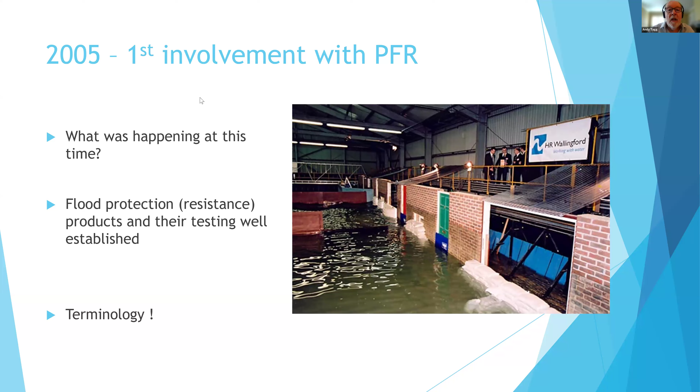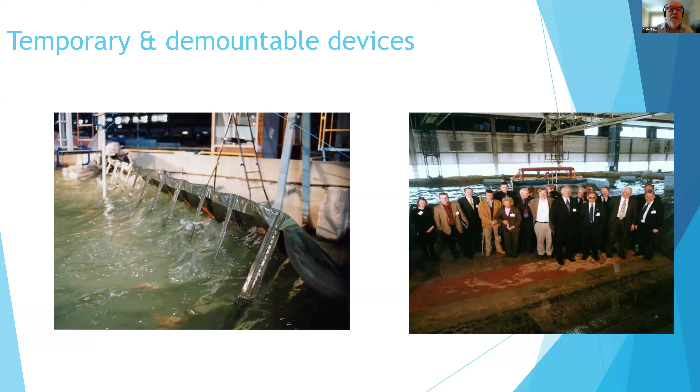And that's why we started to look at resilience, which at the time was completely separate from resistance. So in 2005, what we called resilience is now what we would call recoverability. So if we go to the next slide, Paul. Oh yeah, and that's just showing that back in 2005, there was also testing of temporary and demountable devices, but in the main, most of the testing was flood barriers, air bricks. Okay, so the next slide.

So back in 2005, DCLG set up a project led by CIRIA, and Paul Shaffer was, I think, the project manager for that. It was a research project looking at property resilience. And as you can see there was HR Wallingford, WRc, and Leeds Metropolitan University. We carried out an extensive literature search. We interviewed experts.

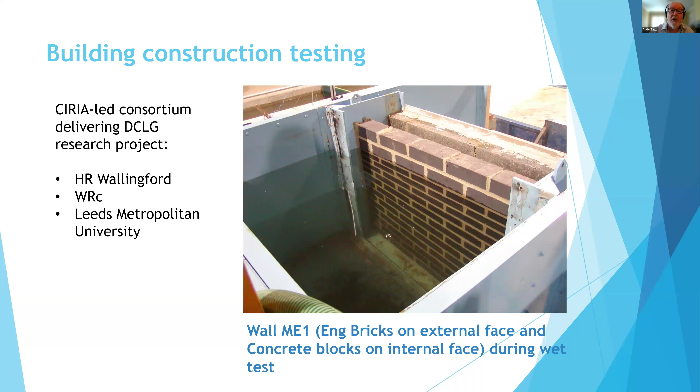WRc looked at the regulatory and legislative background to what would be involved in pushing forward the resilience agenda. And one of the key aspects that I was involved in was actually testing both materials and wall and floor constructions, as you can see there. Because even though there was a lot of common sense around, we couldn't find much hard data. So here's just an example of what we came up with. This is looking at individual elements, so individual blocks and bricks, and we had to come up with what we thought resilience might be. So we looked at water penetration, drying ability, retention of pre-flood dimensions, and we gave a scoring system.

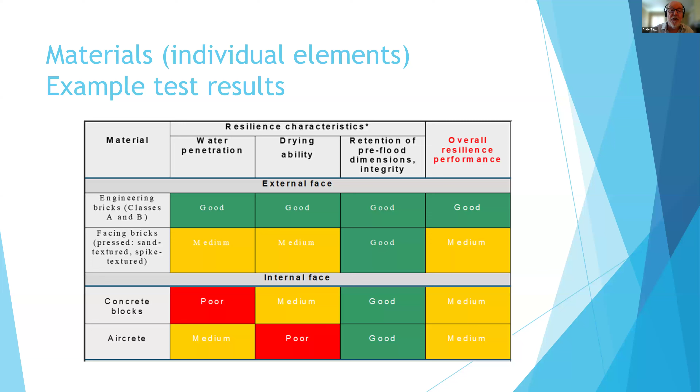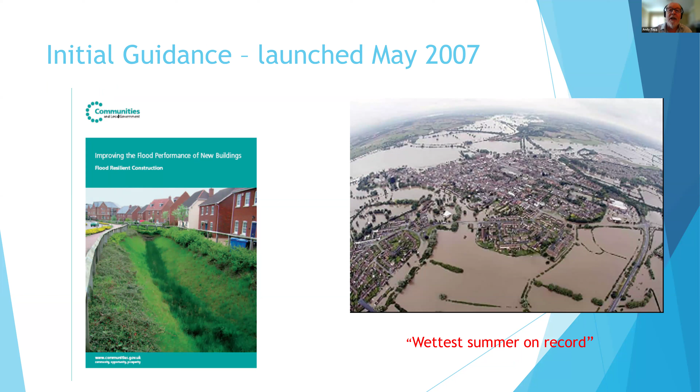So if you go on to the next slide, the main outcome of that was guidance that was launched in May 2007 by the minister. I'm still very proud of that document. It is still available. And it was used by some local authorities, but really it didn't get the prominence it should have done, because in June and then July 2007, we had the wettest summer on record. And that was so devastating, it led to new legislation with the Flood and Water Management Act. And in a way, the guidance didn't really get taken up.

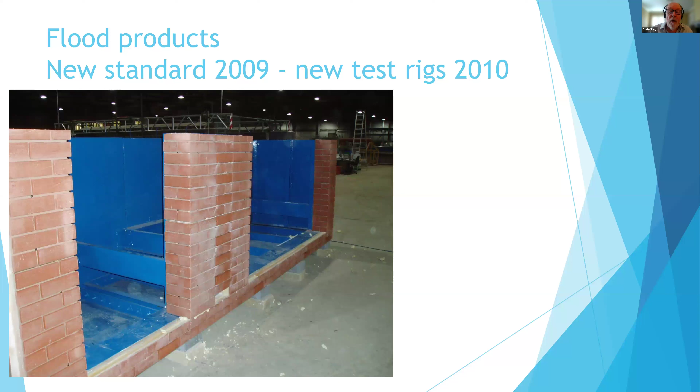So now we move on to 2009. The PAS 1188 standard for flood products was updated, and we had to build some new test rigs at Wallingford. So this is just illustrating the test rigs at Wallingford. A couple of other organisations also started to offer testing, and this was the point in time when we started to see flood doors appear. So that was a little marker in the sand. Then in 2014, DCLG approached BSI and said, we'd like you to turn the 2007 guidance into a standard, because I think that would help dissemination.

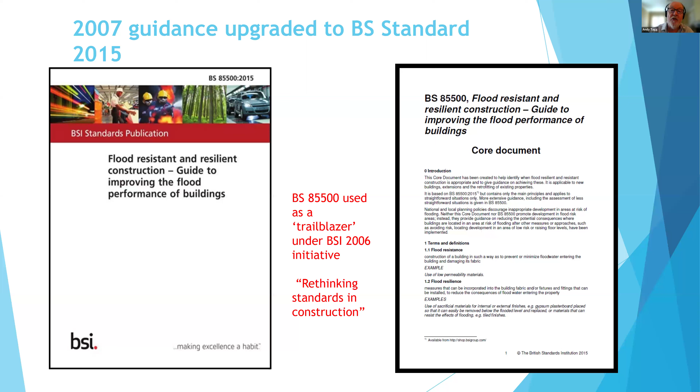Attention had turned more and more to property flood resilience. And so as you can see there, that's the front cover of the 2015 guidance that was turned into a standard. And I should also note that the government was hoping that would act as a bit of a trailblazer, so BS 85500 was a trailblazer under that initiative, Rethinking Standards in Construction. And that was quite important, because the coalition government at the time was trying to minimise and get rid of a lot of regulation, and so that's where BS would fill the gap.

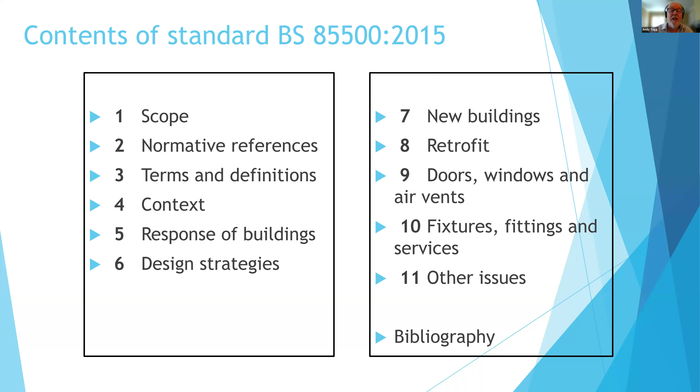That's just a sort of overview of what was in that standard in 2015. I wouldn't worry about that too much, because what's more relevant is what's going to be in the next one. So shortly after that first BS came into being, Peter Bonfield from BRE carried out a review of property flood resilience, and Paul just alluded to the fact that 10 years on, he's carried out another review, and so we had the action plan produced in 2016.

And if you just go down, Paul, the contents there. So the action plan was framed against six sort of headings. With my background, I was obviously very interested in the standards one, but that has been absolutely instrumental in pushing forward the whole of the property resilience agenda. And shortly after the publication, there was the Property Resilience Roundtable set up, and that has been absolutely paramount in pushing the agenda.

One of the key outputs and successes from the roundtable, if you just go back, Paul, was actually looking at providing guidance to homeowners, but also the wider industry, on what's needed in terms of installing property resilience. And so this just shows here that it's just the same as any engineering scheme: you need to carry out surveys, flood hazard building surveys. You need to select what components you're going to install. They need to be installed by competent individuals, and then you need proper sign-off, operation, maintenance, and aftercare.

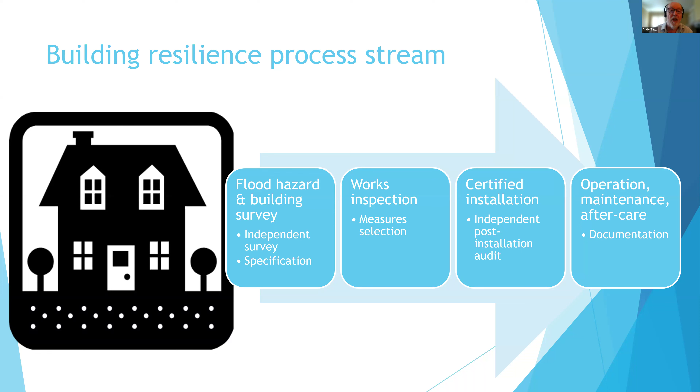So all of that was captured on the next slide with the CIRIA Code of Practice that was published in 2019. So that's the Flood Resilience Code of Practice that sets out these six stages to capture that engineering process. And I've noted at the bottom that there was very detailed technical guidance that came along in 2021 to support those standards. And in the latest work that we've done on the new updated standard 85500, we've completely recognised and dovetailed into that code of practice. So we only cover two of those steps in the new standard, but we make full recognition that we are part of that engineering stream.

So just to say that in terms of what's in the new standard, we started work in 2021. It was finally published in 2025. I think that reflects not only poor chairing on my part, but also the fact it's had a completely major update. There's been a lot of discussion. It's now 70 pages long. As you'll see from Elaine's presentation, there's a lot more extensive detailing and drawings in there.

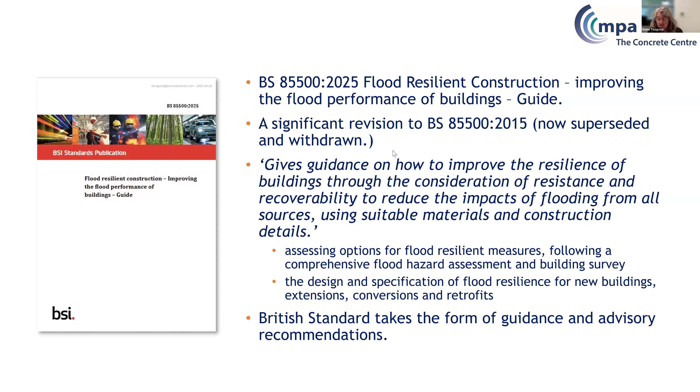And we're increasingly seeing that as being something that we need to be taking consideration of. So next slide, please. What I would say is that I'm just giving some extracts. We've got permission to share all of those extracts in this presentation from the BSI, but I just urge you, you're not going to get all the guidance here. You need to download that document itself to look at it, and the link I think has been provided in the chat.

So what are the principal changes? Well, as we already heard, it makes reference to that CIRIA code of practice, and is consistent with that, which was published since the first one. But it also provides a comprehensive list of impacts of floodwater to all common materials and building elements. There's a lot more detailed guidance. It's supported by detailed drawings for both flood resilience, new builds and retrofits. And as Andy said, it really benefits from all that experience and knowledge that's been gained in the subsequent 10 years.

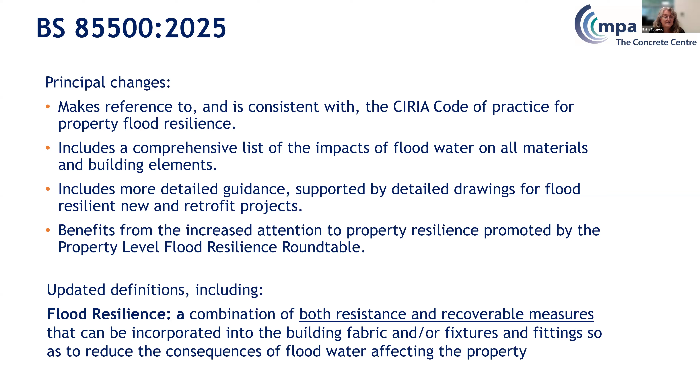And I just want to press return because I want to draw attention to a really core updated definition, which if you press return for the next slide, you'll see, and that is that flood resilience is a combination of both resistance and recoverable measures. And that's one of the core fundamental differences from the way that the descriptions were happening 10 years ago. So it's about incorporating building fabric and fixtures to reduce the consequences of floodwater affecting the property. So it's about the resilience as a whole.

So what's in the standard? Well, you can see it's 2 halves. The first half, I would say, is very much about general principles, guidance, assessment of understanding, not about the solutions, but about encouraging understanding of the hazards and how they relate to the design processes. And then that moves down into section 5, where there's quite a comprehensive list about potential damage, the ingress that might be a result of a flood impact and the hazards, looking at characteristics of floors and walls.

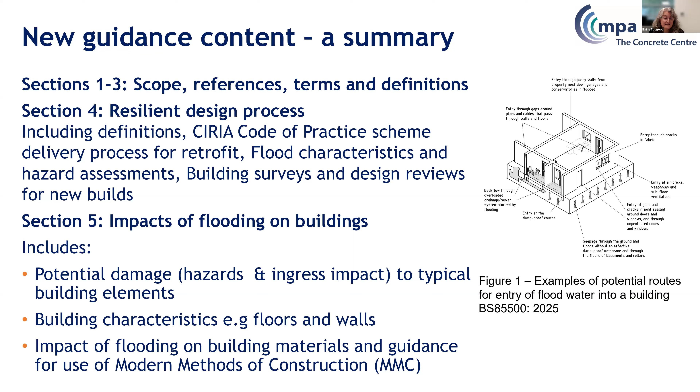And a new part of this guidance is about the MMC. So there's a section in there on the impacts and guidance with regards to using MMC construction. And I think that's an important point to look at. One of the key parts that I picked up from that section is the requirement for manufacturers to be able to demonstrate that this is a flood resilient solution. And of course, that's an important consideration given the potential focus on industrialized construction that's coming through.

One of the points that I picked up there is that, you know, SIPs, there's one bit of guidance that says that SIPs need to be swapped out for masonry because they're inappropriate, to improve the flood resilience. And I think that's an important point to recognise. That bit of guidance comes out in the second section, which is where the real detail is in terms of providing input into how to design.

So initially it talks about design strategies at a more general level, so thinking about site layout, but then it very quickly gets into, in section 7, detailed guidance for new build, and that is through information guidance, but also a series of illustrations on flood resilient solutions that are common wall and floor constructions. Then it talks about them for retrofit, and picks out a couple of key and common scenarios, and then looks at how they can be improved from a resilience point of view. And these are detailed drawings, and I'll show you an example of them later on.

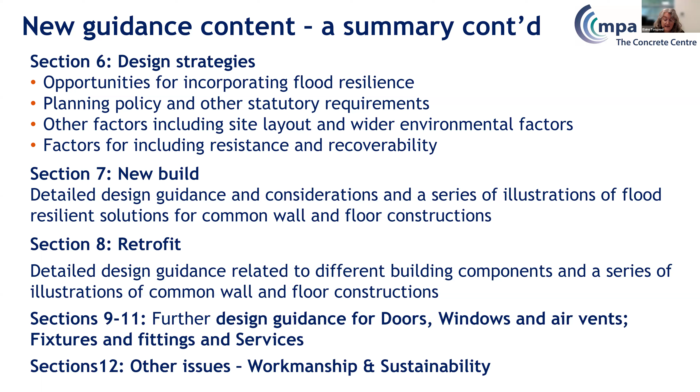Then followed by a bit more further guidance on doors and windows, fixtures and fittings, and then finally workmanship and sustainability. And it's that sustainability bit that is a really important key thing, and something that I particularly like about this new version, because it takes into account sustainability throughout the document in 3 ways, I think, would be my summary. So the first one is underlying all the principles is the principle of a lean solution. So guidance to limit unnecessary ripping out of materials and less associated construction waste and resources and carbon associated to it.

And then critically and really usefully, as my third point with regards to sustainability, the guidance includes a lot about insulation. There's a section on the impact of building materials that includes a lot of guidance about the type of insulation to use and what you should be looking for within specification. All of the built drawings include insulation, so therefore establishing principles of flood resilience with insulation in place.

And that's particularly crucial with regards to retrofit, because of course, if you're going to be doing any major bits of work post a flood event, this is a real opportunity to improve the thermal performance of the property. And the previous guidance, I know from experience, I remember trying to go around the guidance, I was chasing around, where do I put the insulation? What type of insulation is needed? And that has been nailed, as far as I can see, in this document.

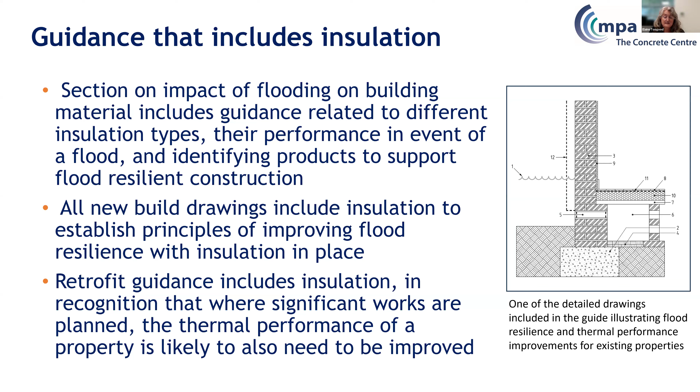And I think it's a really good move forward in terms of the guidance that we're providing. So bringing together very many of those issues that we all need to be thinking about when we're considering sustainability as well as embedding flood resilience. So next slide, please. So I've just shared two of the various drawings that are in the guidance documents, and I think this is again a real step forward.

All the details shown in the document are junctions between floors and walls, and that's a real improvement, because the junctions are often where many of the issues arise for flooding. It's the relationship between the two. So there's guidance to convey the principles of materials and design selection. It's not just a series of solutions. It's also trying to raise awareness and understanding of why something is done in a certain way. And I think that's really critical so that designers and anybody involved are able to apply that to their projects.

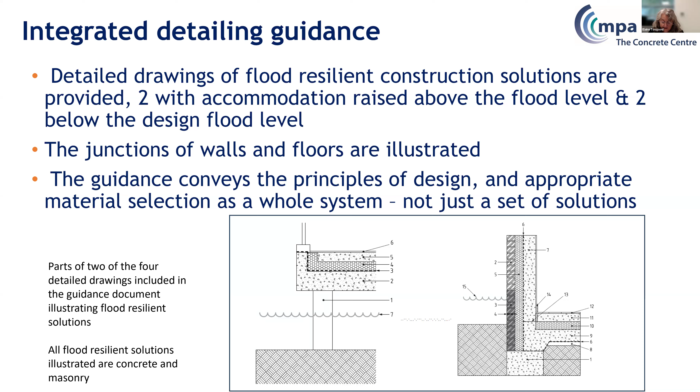Flood resilience, as hopefully most people are aware, has got to be a whole system approach, a whole building approach. It's not reliant on just one element or a product in isolation. It's often the junctions that are the critical areas of consideration. And the guidance has moved on quite a lot from that simplistic, possibly even misleading table that Andy shared earlier on, which just looked at products. You've got to be looking at the whole thing and how it coordinates.

And what I would say is that all the resilient solutions that are illustrated are concrete and masonry. Now, why is that? Well, you could go back and understand that by looking at some of these tables in section 5, where tables 2 and 3 provide really useful summaries about commonly experienced actions and impacts of flooding on materials. And if you look at the extract that I've got there, masonry, why is masonry included as a solution? Well, one of the most common impacts is to do with the mortar.

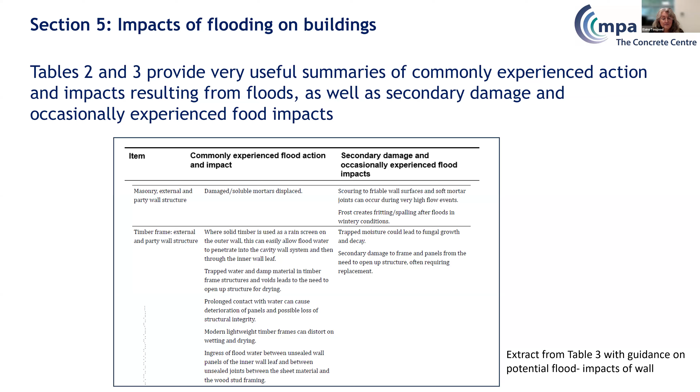It's not actually the structure of the building, if it's constructed in masonry, that is likely to be impacted by flooding. By comparison, with the timber frame extract there, under prolonged contact with water, there's likely to be deterioration of the panel, or possibly loss of structural integrity. So that's just one illustration of what the guidance tries to do: not just provide solutions and integration, but the guidance and reasoning behind it, so that people are able to make informed decisions about material choice and the way things go together.

And just coming towards the end, I think another really good inclusion are the three sets of typical new build constructions that have been drawn to improve flood resilience and explain the hazards related to situations where there may not necessarily be a designated flood risk. So this could include surface water flooding, for example, or improving flood resilience against storm impacts. Now, this is really excellent, and it really underpins the point I made earlier about embedding climate change resilience into new build construction.

So what that does is a pair of details that shows, well, this is what you might normally do. These are where the hazards might be and where the water might come in, and what the impacts on the internal materials will be. And then these are the simple solutions and mitigation measures that could be taken to help and improve the resilience.

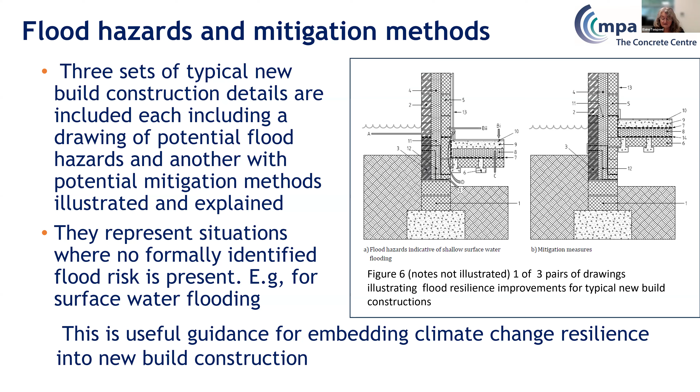And I think they're an excellent set of guidance in there. So my last slide really is a summary. I think this slide is great. Why is it important? I've really focused on that in this talk, but actually we know we are planning on building out lots of new homes. We know how challenging it is to retrofit. We've got to get the building right.

And I think this is really essential reading for anybody who's interested in embedding climate change resilience, flood resilience, into building development now, to make sure that what we're building today is appropriate for the future. Just as a final point, I wanted to say it's not about promoting building in flood risk areas, but it does provide guidance on how you can reduce the consequences if you are building in those areas, which inevitably does happen. That could be extensions to existing buildings or permitted developments.

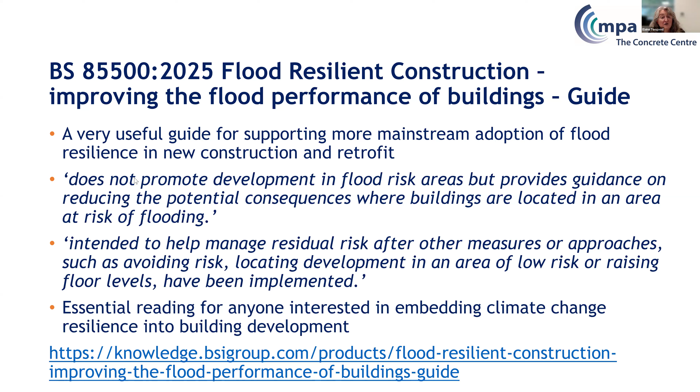It's about managing residual risk after all those other measures or approaches have been implemented. But I do urge everybody who's involved with construction to have a look at that. And my last slide is, we think it's so good, we're writing our own guidance to dive deep into how you use concrete and masonry based on the guidance that's in there, so we can provide some additional assistance with how to do that using those products.

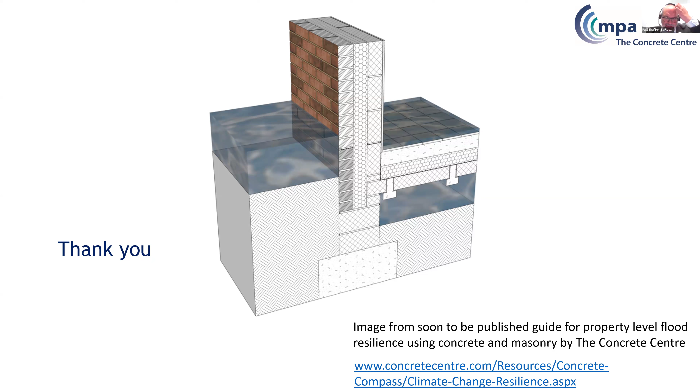And audience, please do start thinking about some of the questions to ask Andy and Elaine on some of these things. That whole marriage of resistance, recoverability, the products, the process, the systems, these are the people really to start questioning with the knowledge and experience of how things moved on. You've got a great set of speakers to ask some questions. So thank you both for that.

I will now pass us on to Joanne, who will give us an overview of aligning PFR in historic buildings. Over to you. Great stuff. I love how they've condensed 20 years of flooding into a 20-minute talk, and I'm about to condense 300 years of construction into one. So that'll be fun.

Good luck. Yeah, so I'm going to try and condense it into talking about the code of practice. Then I'm going to go on to explain traditional buildings a bit, and then I'm going to talk about how PFR and 85500 align with it. So if I can go to the next slide.

So the code of practice is a great starting point. From a heritage point of view, though, I feel like it has one additional element that it needs to consider. So I gave it a standard 0, which requires you to really understand what's going on with significance. So on any projects that you're working on, it's really important that you identify how many listed buildings you might have early on. What is their listing status? Are they in a conservation area? Are they non-listed and in a conservation area? You can find this out via the search the list on Historic England.

The little thing on the left is actually Plymouth. So that really shows you how many listed assets are in one area. The reason this is important is basically we've got 3 listings. We have grade 2, grade 2 star, and grade 1. Grade 1's the highest. When you're assessing change, you have to understand the significance. And if you've got a grade 1 building, you require more justification. So the higher the listing, the more justification you require.

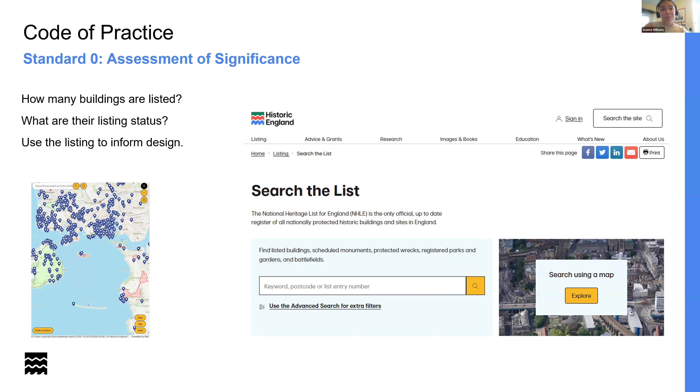So if you open this dialogue early, then you're going to establish whether you need individual applications or if you could create a design guide, or you could even do a local listed building consent order. Basically, all of these communications and deciding on the process will speed up any work you could do. So my key message on what I think standard 0 should be is listen to one another, learn from one another, and collaborate. Don't expect a conservation officer to understand flooding and a flood person to understand conservation. We're all specialists in our own areas, and that's really important. Go to the next slide.

I always think it needs a bit of expansion to include significance in more evidence. Knowing the significance of the building helps your design options early on. For example, if the front door is modern on a historic building and has no significance, it's less likely a replacement would be rejected. But if the door is 300 years old and in immaculate condition, you'll need a lot of justification to get consent to remove it. However, it's not acceptable for anyone to just say no, you can't do work because the building is listed or significant.

The thing with conservation is it's about the management of change. With flooding, you've got liquid moisture problems, pressure and force from floodwater, and contaminants, all of which can cause decay, deterioration, and structural impact on the building fabric. Especially when a building is continuously flooded, you get wetting and drying of the materials, and any material, historic or not, will be impacted by this. So it's about understanding what the flood risk is and what the best solution is for the building, taking into account its significance.

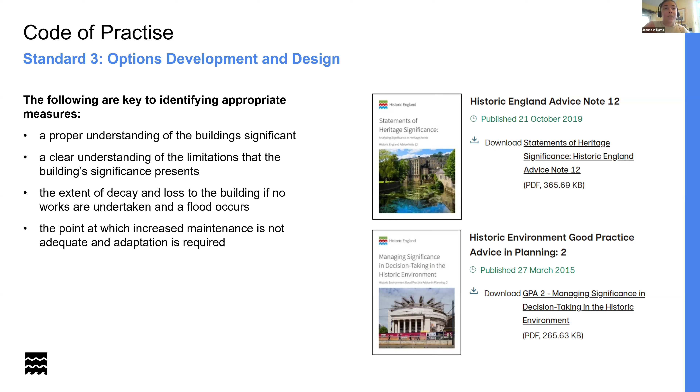Why is it so complex? I get this all the time. Heritage and older buildings are often branded as complex, complicated, and annoying. The thing is, if you talk to me or anyone else in heritage, we'd say the same about modern buildings.

With traditional buildings, we're talking maybe 2 or 3 layers of construction - probably lime plaster, the main substrate, and in some situations a lime render. Look at the modern equivalent, and you could be talking 7 layers: gypsum plaster, air and vapor check layers, insulation, 2 layers of cavity walls, and sometimes cement render. So which one's more complicated, 3 or 7? That's not to say either is better, they're just different. Modern materials don't really respond to their environment - that's fine, that's why they're built with damp-proof membranes and damp-proof courses, and they don't respond well to ground movement, so you'll see a bigger shift structurally.

Whereas traditional buildings are made of natural materials, they came from our environment and are normally quite local. Their open capillaries mean they can take in liquid and expel it naturally without intervention from us. They're also very flexible, so timber frame buildings that have been around for hundreds of years will look crooked and a bit odd, but they're quite happy like that. It's about understanding the difference between modern and traditional, and being really careful about what materials and methods we bring into them.

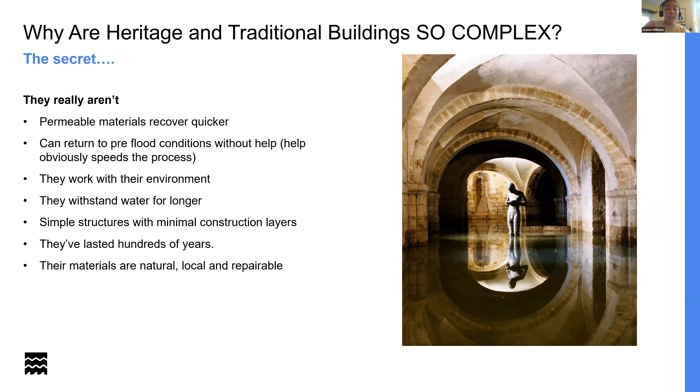It's also really important to understand what the owners have done to it. Just because your building might be 300 years old doesn't mean it's stayed that way. It's highly likely someone's taken the floor up and replaced it with a concrete floor, or put an extension on.

Not always are these materials appropriate, and they could be doing damage whether it's flooded or not. So when dealing with an older building, it's the same as if you're dealing with a flood site. You would hire a flood person who knows what they're talking about to do a flood risk assessment. Just hire a conservation accredited person. We've got surveyors, structural engineers and architects out there who specialise in these buildings and can offer you support.

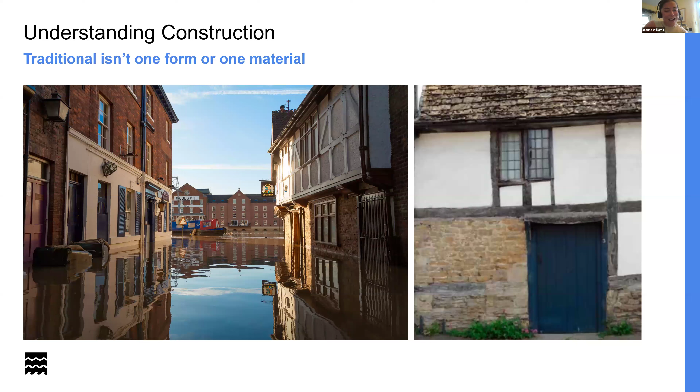So when I first wrote these slides, I went to a conference last week about flooding and landscapes, and I thought this could be a really good metaphor for explaining traditional buildings. You can all tell me at the end if I've totally failed with these analogies. Can we go to the next slide?

So, yep, the majority of buildings are solid permeable masonry. This is my analogy for explaining permeability. Tarmac or concrete paving causes water to run off into our landscapes, right? But when they have a crack in them, the water gets in between, and it will cause the material to break down because it's trapped, and that's where we get potholes.

So when we put an impermeable material, like a cement render, onto a traditional building, the same thing happens. The water gets behind the concrete, and then it will start to deteriorate the permeable material behind it. So this is why I'm trying to explain, don't cement render a lime pointed building. It's an issue as soon as moisture gets in there, and that's when we start to get a failure.

So the other way of explaining it is the building on the left, as you can see, floods a fair bit. About 2 or 3 years ago, the landlord removed all of the impermeable materials. It had a concrete floor, it was cement rendered, it was gypsum plastered internally. When they had to decant the tenant, it took 6 to 9 months to dry. That's quite extensive. They removed all of that and replaced it with limecrete and a lime floor. It actually flooded about 3 months later, and within 6 to 8 weeks the tenants were back in. That's a substantial difference on the drying time.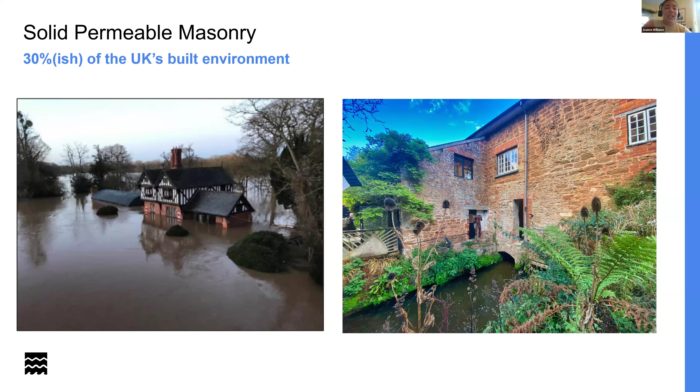Let's go to the next slide. However, not all traditional buildings are made of permeable masonry. We also have impermeable masonry. It's a smaller percentage, generally granite, flint, marble - there's probably a few other stones I've not mentioned. It's generally found in the Lake District, Hampshire, Scotland and Wales.

So the difference is these materials are not permeable, so they can't in their own right take up the liquid. This is when the mortar is really important. We've already discussed cement mortar and the pothole analogy. In this case, we need the lime mortar to take in and disperse the moisture from a flood or rain, and it needs to disperse across a larger surface area.

So my analogy here is not perfect, but let's imagine the lime render or lime mortar is a chalk landscape. We accept that chalk landscapes deal with flooding much better because they are porous and more open, so the water free drains quicker through it than if it was clay. The lime render is pretty similar - it's got expansive areas of pore structures, and all of these pores are able to absorb and take up water. This doesn't mean it comes through into the building quicker. It means it spreads across the surface until these pores are so saturated, and that's when it comes onto the other side.

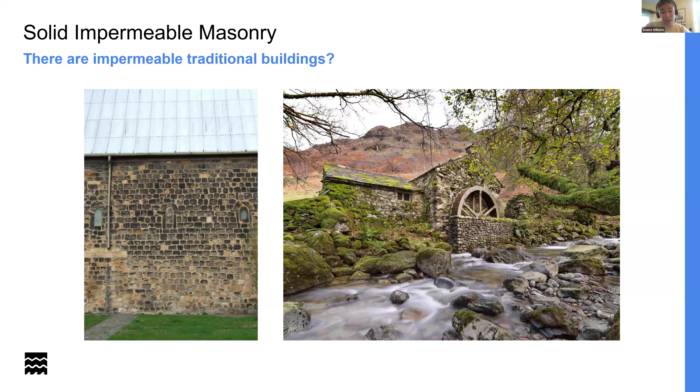Can we go to the next slide? So an even smaller percentage of buildings are timber and earthen structures. You might know earthen cob, clay lump, clump - there's a few different terms for it depending where you're from. It's really important to note not all of these are listed. There are quite a few buildings out there that are timber and earth and they're not listed. The reason I've lumped these two together is because they've got similar characteristics - they tend to both sit on masonry plinths.

As you can see from the picture on the right, it's quite a small plinth. That could be anything from 1 layer to 300 mils to 600 mils. The main importance is that the main strength of the building actually comes from the plinth itself, not necessarily from the earth and the timber.

This isn't to say they're bad constructions. They're actually really good constructions, just slightly less so when they're in a flood zone. The problem when a flood occurs on earthen or timber structures is that it will cause erosion of the earthen walls. The collapse that happened to a pub actually wasn't because of a flood - it's quite hard to get a flood picture of that. That was caused because water got in from the rainwater goods and basically saturated behind the cement render, blew it, and you can see the structural failure. Another good reason not to use cement render.

Apart from the erosion that could happen on the earthen building, with the timber it goes slightly different. Timber frames aren't fixed to their plinths, so with a major force you could actually move the entire timber frame. With less force, you can pop the infill panels out, which are the little bits on either side of the frame. They can pop out, it could crack the timber frame generally, or it could cause it to splinter. And obviously the amount of water that comes into it causes rot.

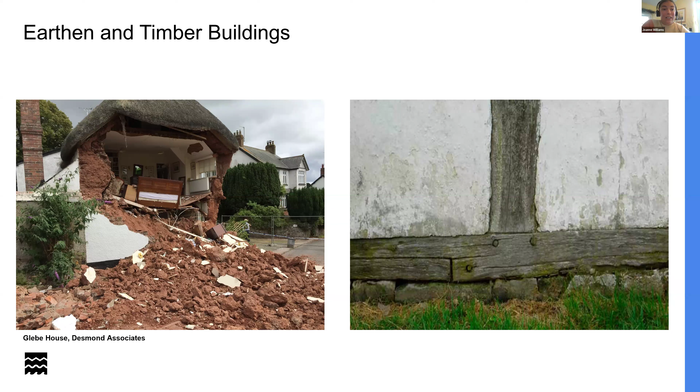One of the questions on that is, if we're thinking about a flood door, why would you install it? If it's going to be above the plinth line, the water - you've got a structural issue. So we try not to think of it that way. If we go to the next slide.

I'm really hoping my analogies are helping to make a bit of sense on this and understanding why modern and water resistant materials aren't good for traditional buildings. This is actually my house. The picture on the left is bitumen and tar - it's actually the room I'm in now. It was an extremely damp and cold wall.

The picture on the right is a cob wall in my living room that was burrowed out by rats, and that was because they'd used inappropriate materials in those as well. You can see the structural failure that actually occurred on the cob wall. Since I've repointed it in lime and re-rendered it, the building's much better - it's warmer, it's drier, and we haven't got any structural issues. So it's just really keen to think about how we do this.

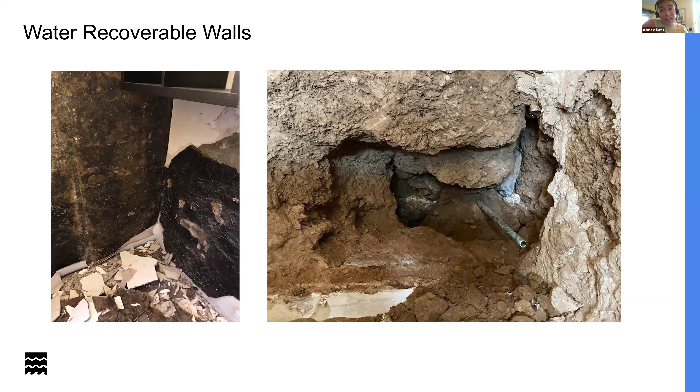So if we go to the next slide.

It was quite interesting reviewing the new BS85500. If you read it with the mindset of what a modern building is and what a traditional building is, it's quite evident that modern construction has far more materials to consider, and that many of these materials aren't particularly resilient or recoverable, which is very different to traditional buildings.

In section 5.1, in the general, it recognises that all buildings and the materials are different. So when it comes to historic or traditional construction, you're not really expected to do anything different than you would be for any other building. And actually the impact from the floodwater in traditional construction is less likely to result in the material changing form after a flood, whereas it would in the modern.

The standard really supports the use of appropriate materials and highlights the use of lime mortars, renders and plasters. It also highlights the need to fully understand moisture movement and drying, to include secondary drying of hidden fabric, which is very important for historic buildings as well as modern. It also talks about how lime plaster can slow flood water and speed up the process of drying, which was explained earlier in the permeability discussion. It also encourages you to look for independent professional surveyors or engineers, and that we shouldn't be looking at water repellents for traditional buildings because you risk trapping dampness and increasing either frost damage or structural failure.

One of the other aspects, and Elaine touched on it slightly, was insulation. Insulation on traditional buildings is a lot more complicated than on modern, and I'm sure most of you have seen in the news about the external wall insulation schemes that haven't resulted in particularly nice environments. We're doing a lot of work in this area at Historic England with universities, and it's still an area that we're trying to understand if there are any materials appropriate for it. So it's slightly different to the advice you'd give on a modern building if you're looking to improve its energy efficiency.

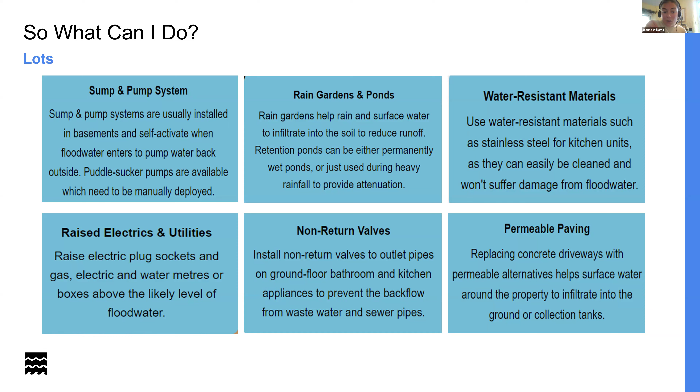And also something I just always like to point out is don't assume you have to remove historic timber. So older timber is naturally capillary active, whereas MDF, for example, isn't because it's man-made and it's got additives we've added to it. So you go to the next slide.

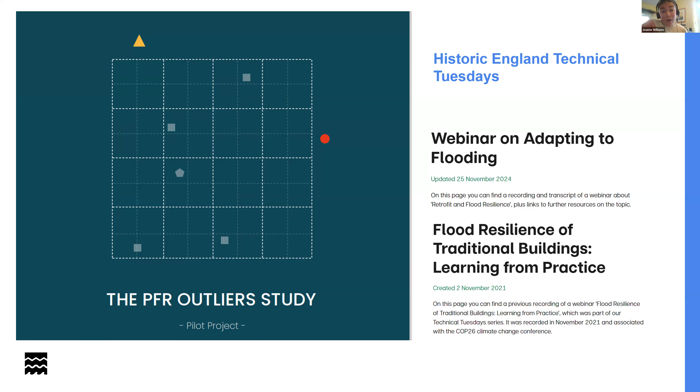So it's just a final note really that though property flood resilience has a place in the flood sector, it's not always the right option or the only option. In 2022, I undertook a study with the Environmental Design Studio to understand why certain buildings fell out of scope of receiving government financial support. And then we ended up finding that PFR wasn't the only option. So if you go to the next slide.

We identified that there were 14 in total different ways of adapting this building in Yalding in Kent. Ideally, obviously, don't demolish a building, but we have to accept with climate change, these things happen and we can't always control what we're going to have to do. We're shortly going to be tendering for phase 2 of this, which will be looking at coastal erosion. So that will include coastal land loss and increasing sea level rise from flooding. And then if we go to the next slide.

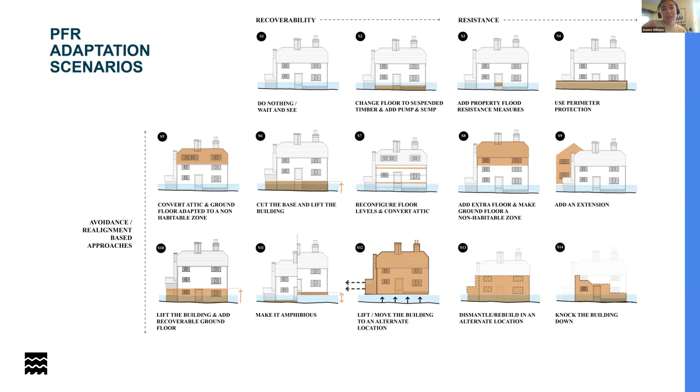Yeah, so sorry, that was super speedy. It's very hard to get 300 years of construction into a talk. We have revised our guidance. So CIWEM, the Environment Agency, RAB Consultants and BeFloodReady have been really supportive of us for the last couple of years doing that. And it will, fingers crossed, be out in the next 2 weeks. I'd hoped to get it out today, but we got blocked a bit with images.